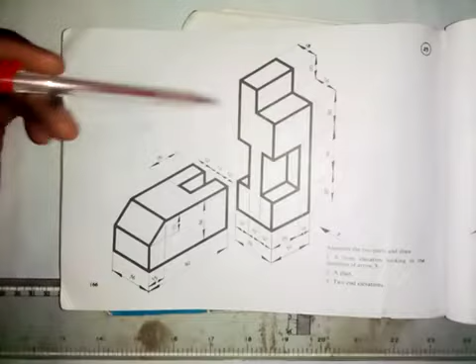Welcome to my channel, and here I'll be showing you how you can assemble this part together, as we are told here that we should assemble the two parts. Okay, so what you want to draw is to put this body on this body. So that's what you want to do. So I'm going to show you how you can do that with ease.

As you know, these are two isometric objects, and we have to put them together to form one isometric object.

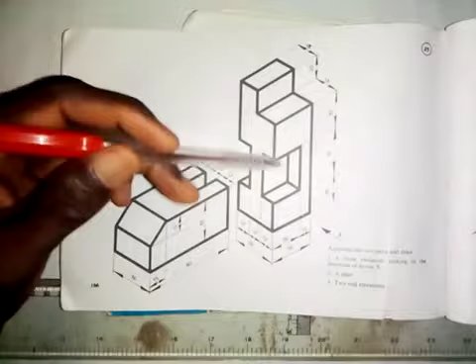And it's very important that you practice this subject. Very important. I'm using JN Green. That is a textbook with the blue cover, and I'm on page 166 of the textbook. So I'm not going to explain dimensions, as I'm showing you how to put the two parts together, how to assemble them. I will also be making mention of dimensions as we have here. So let's start. First of all, we are going to draw this particular body first. So we are drawing this first, then we put this on it.

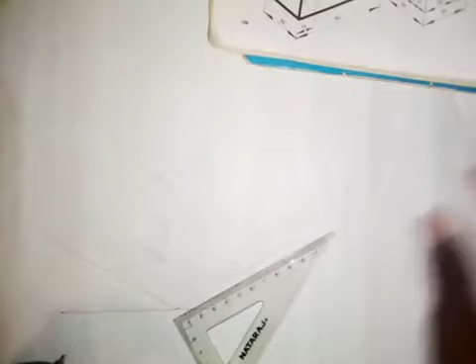So let's start. The first thing we need to do here is to draw a horizontal line. So we draw a horizontal line like this. Okay, so then we take our 30-degree set square. So we draw a line in this direction. Make sure you have enough space on this side, and also we draw a line in this direction with our 30-degree set square. If you have the textbook with you, just open it and follow me as I'm doing it here. So we have distance from here to here to be 30 millimeters.

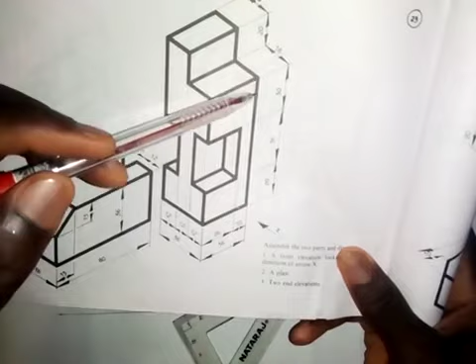Distance from here to here is 24 millimeters. This is 12. So that's 24. Sorry, that's 36 millimeters. It's 36, not 24. This is also 36. And then we have distance from here to here. So this is 20, this is 36, that's 56, plus 30 again, that's 86. And then we have 20 from here to here. So that will give us 106.

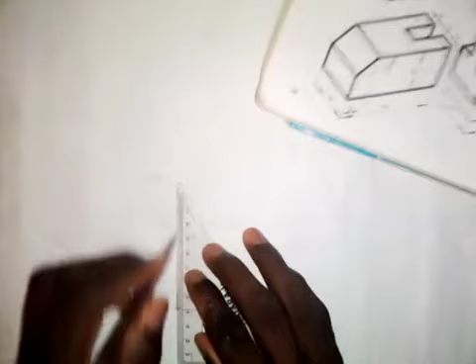Okay, so what I'm going to do first is to draw a vertical line here. So here I'll be drawing a vertical line up like this. Then I'm going to take a measurement of 36 millimeters. So this is 36 millimeters. So I'm going to draw a vertical line at this point like this. Okay, so I believe you can see the line.

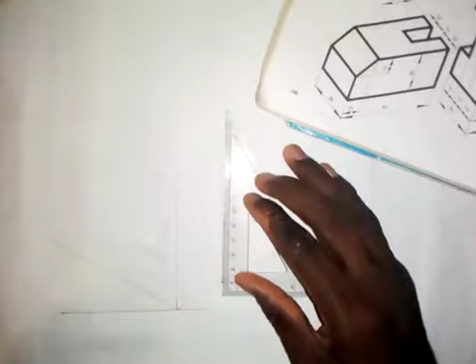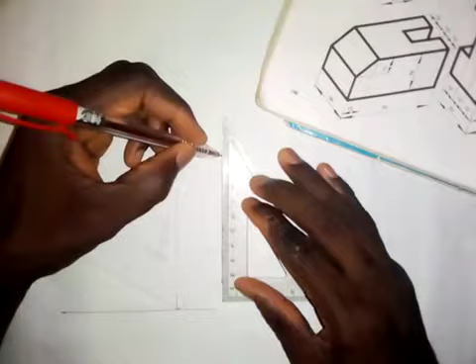So the next thing that I'm going to do is to take a measurement of 20. So I'm taking 20 here first. Then I will take 36 millimeters. So this is 36 millimeters here. Then I'm going to take 30 millimeters after this. This is 30 millimeters. And then I will need to extend this line. I'll take this line up a little bit like this.

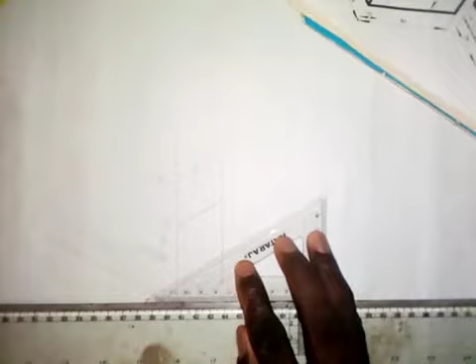So here I'm going to draw this line. For this point, I will draw this line in this direction. Also, I will come to this point and draw this line in this direction. Also, I will come down here and draw this line in this direction. So first of all, I want to work on this part first. So that's what I'm trying to do. So we'll draw this line in this direction. So we have that.

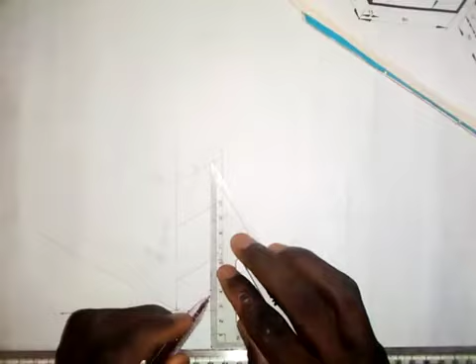So I will also come down here and take 10 millimeters from here to here. If you are looking at the drawing in the textbook, you know what I'm doing here. So here I will draw a vertical line from here to here. Okay, so the next thing that I'm going to do is, I'll come to this point here.

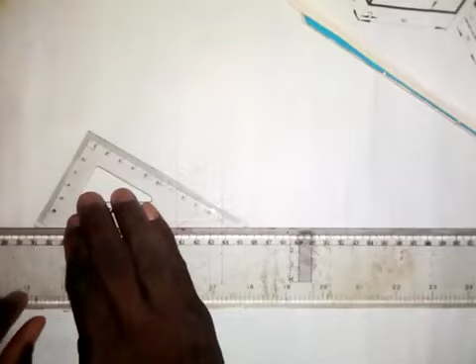I will draw a line in this direction, and I will also come to this point here. I will draw a line in this direction like this. So let me show you the line that I drew there. So this line and this line, that is what I did here. So the line that I drew here is this line that we have here.

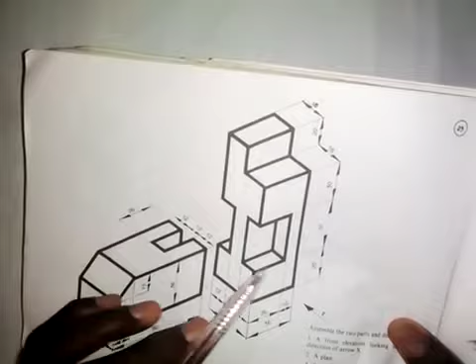Okay, so I want to form this part. Let me come down and form this part that we have here. But before that, I need to work on this part. Let me work on this part so that we can see what we have. We can bring out this shape here. So that's what I want to do.

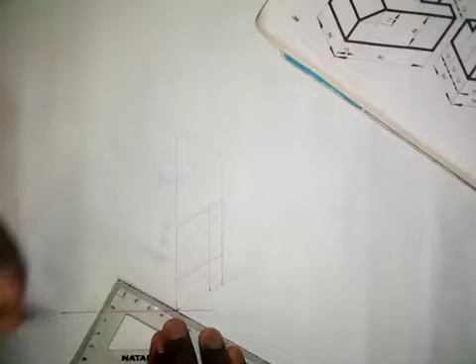So you first of all take a measurement of 36 millimeters. So this is 36 millimeters, and I'm going to divide this. That is 12 as we have in the textbook. So this is 12 millimeters. So next, we take another 12 millimeters. So this is another 12 millimeters here.

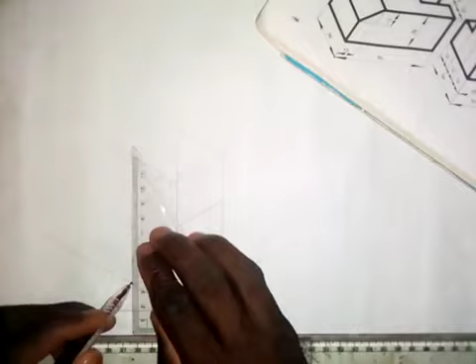Okay, so here I'm going to draw a vertical line. So here I will draw a vertical line. Here also I will draw a vertical line, and here also I will draw a vertical line. Okay, so looking at what we have here, at this point I'm going to draw this line. So draw a line from this point in this direction. I will come to this point also, I will draw a line in this direction.

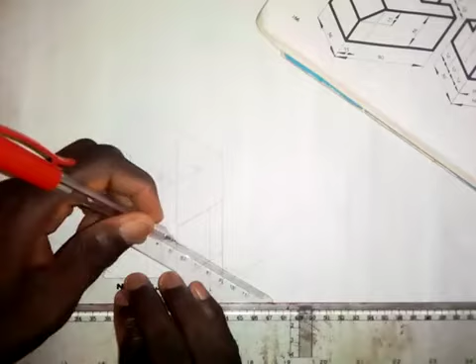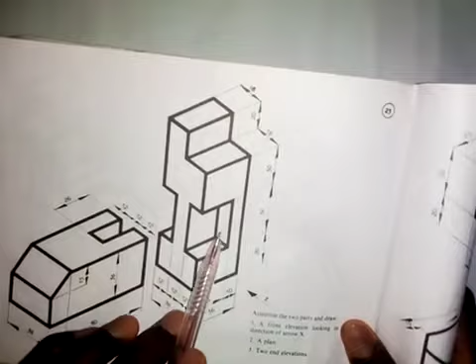And then coming down here, from this point I'm going to draw a line in this direction to meet this line. So wherever this line meets the line that we have here, I will draw a vertical line up, which I believe you can see now. So what I've done here now is that I brought out this shape here. So I brought out this shape that we have here.

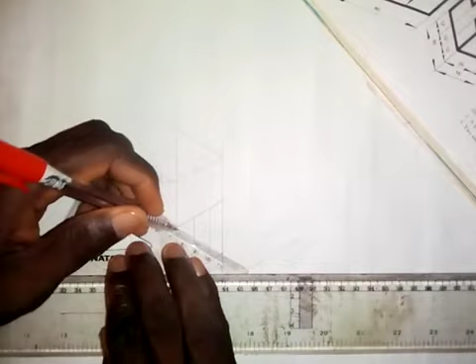So also from this point that we have here, I'm going to draw a line in this direction like this to meet this line. Okay, and then I will come up here. So coming up here at this point, I will also draw a line. So draw a line from this point in this direction. Okay, so looking at what we have here, let me bring out the shape that we have produced here on this part. Let me bring it out.

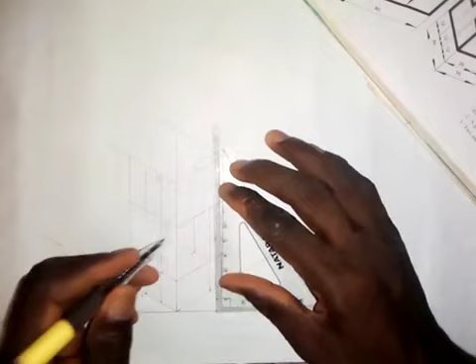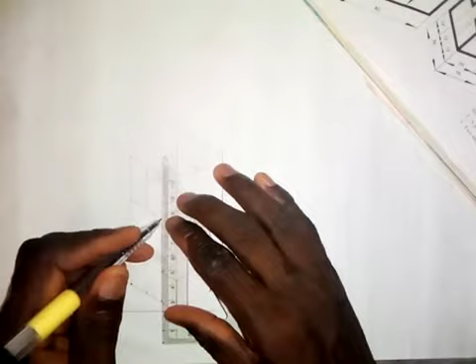So I'll make this line a thick line. So make this line a thick line like this. Okay, so this line also is a thick line. This line is a thick line. This line here is a thick line. Then this line also is a thick line. So this line is also a thick line. Okay, so this line will be made a thick line from here to here.

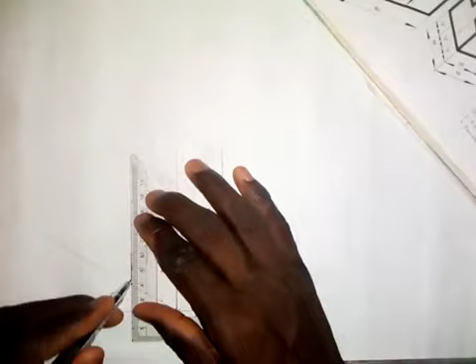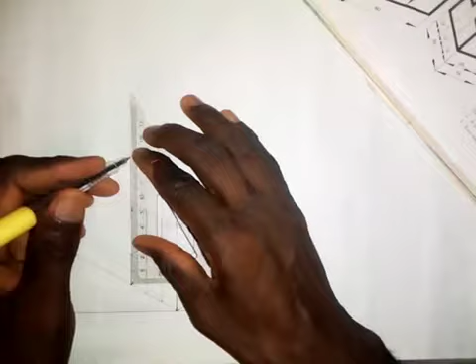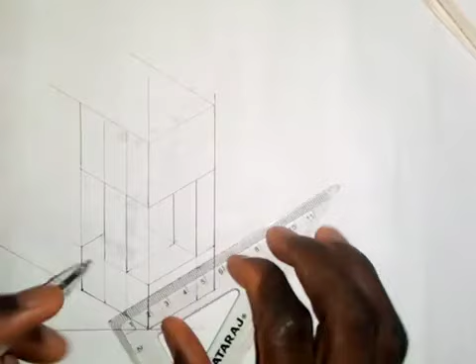And also I need to make this line a thick line. So this line also is a thick line from here to here. Okay, so then we need to make this line a thick line from here to here. So we also make this a thick line, and this line also will be a thick line from here to here. Okay, so this line we made a thick line from here to here. So also this line, make a thick line from here to here.

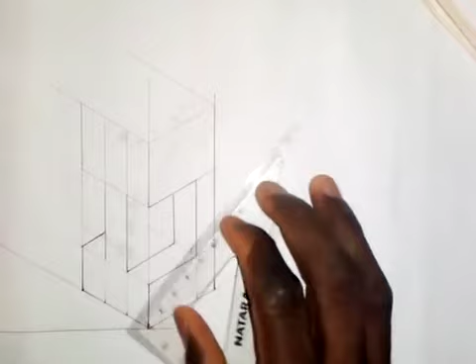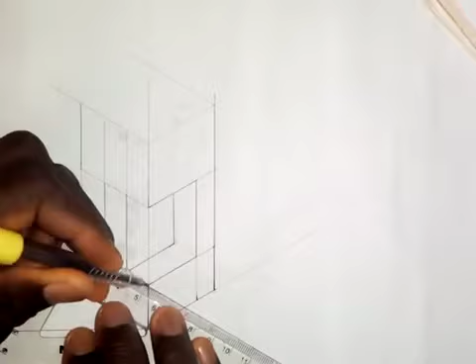Okay, so we are bringing it out little by little. So I need to come here. So I make this line a thick line from here to here. Also from here to here, this line will be a thick line. Okay, so I will also make this line a thick line from here to here. Alright, so then coming up here, I need to make this a thick line from here to here. So also from here to here, make this a thick line. Okay, so the work is coming out little by little.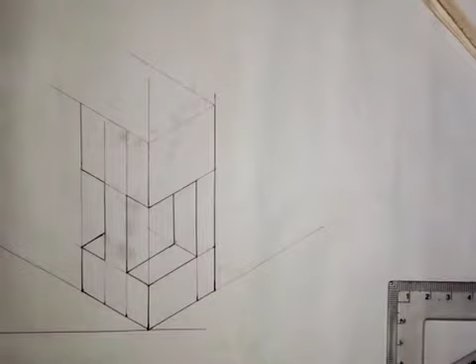So let's go and work up here. So we want to work up here now. Let's bring out this shape as we have here. So we have that distance from here to here is 18 millimeters.

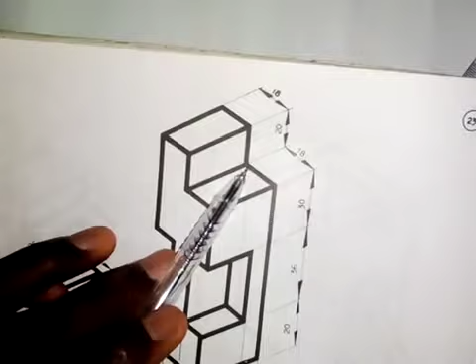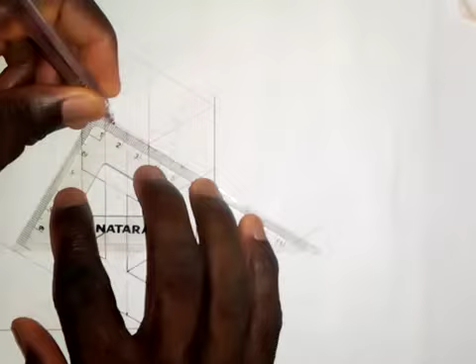From here to here is also 18 millimeters. So what we need to do now is to take a measurement of 18 from this point. So we take 18 millimeters from here. So this is 18 millimeters here. So here I will draw a line. I will draw a line from this point, transfer it to the other side like this.

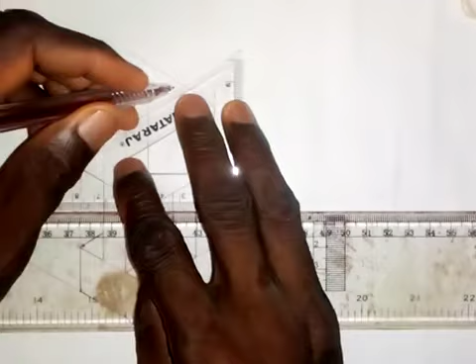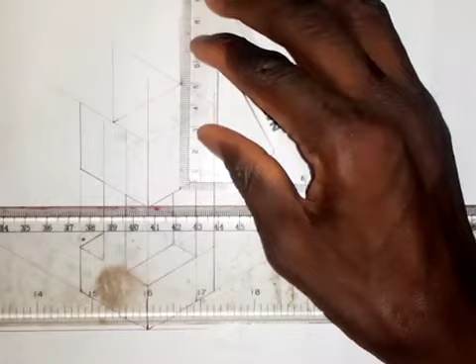So then I'm going to erect a vertical line at this point. Also here I will erect a vertical line at this point. Okay, so the height from here to here is 20 millimeters. So I will take 20 millimeters here. So from here up I will take 20 millimeters. This is 20 millimeters. So I will transfer this 20.

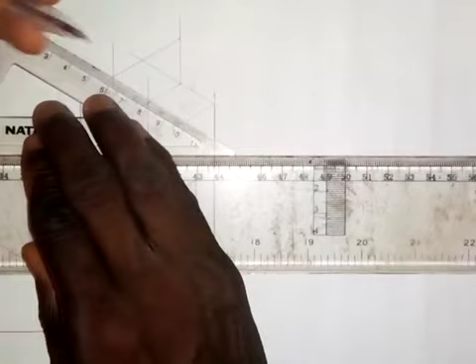So I will take it, bring it to the front side, and I will take it to this side. From this point I will take it, so take it to this side, and I will come here also. So come in here, so I take it to this side. Then I'm going to draw a vertical line here. And then here also I will draw a line. So I will transfer this point to the other side like this.

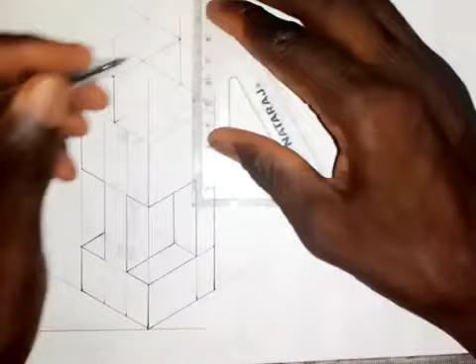Okay, so I believe you can see what I've done so far. So all I need to do is to make this a thick line. So I make this a complete thick line, and this line also is a thick line like this. So here I will make this line a thick line. So this line also is a thick line.

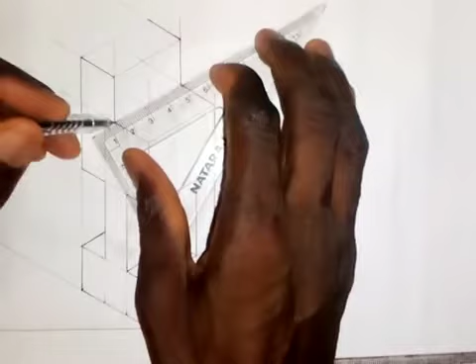Okay, so then this line will be made a thick line. So this line also made a thick line. Also this line is a thick line. So this line here also is a thick line. Alright, so you can see that we are done with this part. Looking at what we have here, we have completed this part.

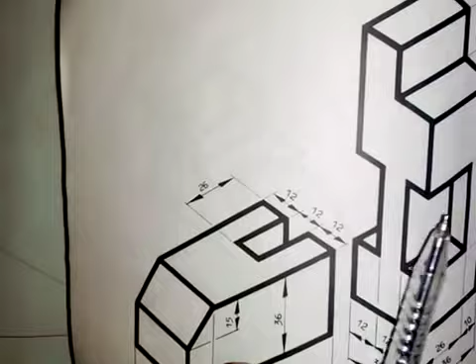So we need to put this one here now. That's what I want to do now. So let's see how that will be done. If you look at the distance from here to here, which is 36, it's also the same as what we have here, 36. It is written here, 36. And from here to here, this is also 36, this is also 36.

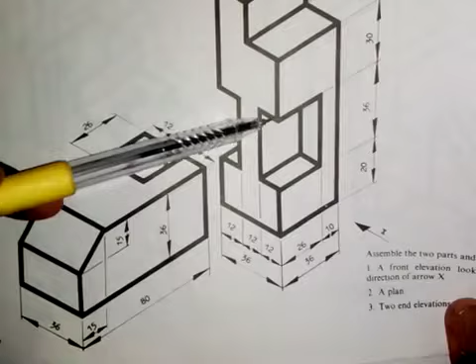So distance from here to here is 12, this is 12, and distance from here to here is 12, this is 12. This part here is entering into this, so the groove that we have here, or the hole that we have here, is entering into this. So that's how we are going to do it.

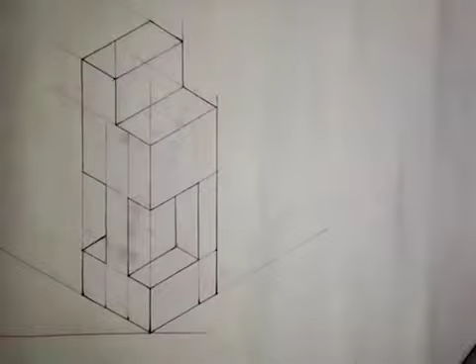So what we need to do now to fix this on this is that from this point here, we extend, we draw a line. So we are going to draw a line from here. From this point, just take it forward like this, and you come up here also. So you take this line forward like this, and you come here also. Okay, that's what we need to do.

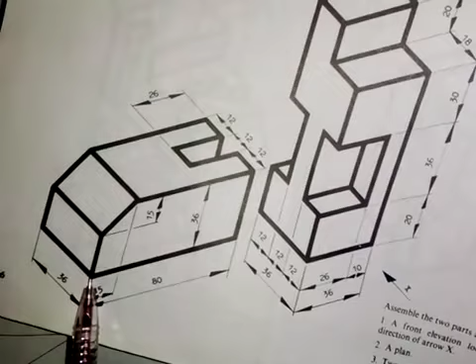So the next thing that we are going to do is, as we have the distance from here to here to be 26, we are going to take a measure. The total length from here to here is 80. So we are going to subtract 26 from 80. So whatever we get is what we are going to take as its distance from here forward. Okay.

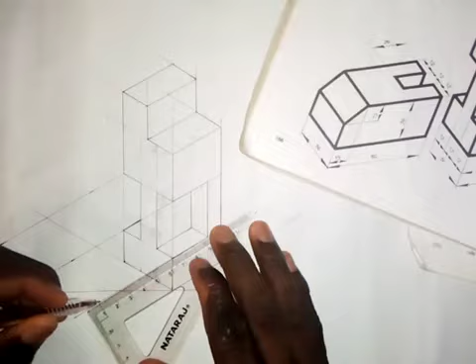All right. I've subtracted 26 from 80, and that gives us 54. So what we are going to do now is to take a measurement of 54 millimeters from here. So from here to here we take 54. So this is 54 millimeters. So here I'm going to draw a vertical line like this.

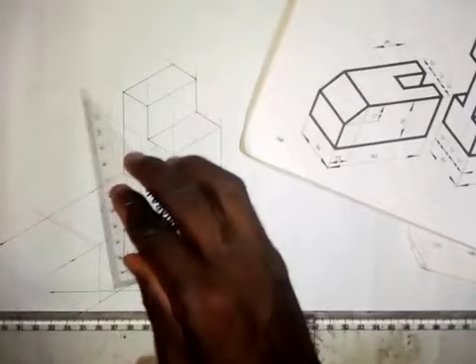And I'm going to transfer this point here to the other side. Okay, so I transfer this point to the other side, and here also I'll take this point to this side, and this point here I will bring it down here. All right, you don't have to worry, bring out the shape.

Now if we are putting this shape on this one here, there is a part we are not going to see. We're not going to see this line, we'll not see this line. So I'm going to remove those lines since we are putting the other one on it. So I will remove this line like this.

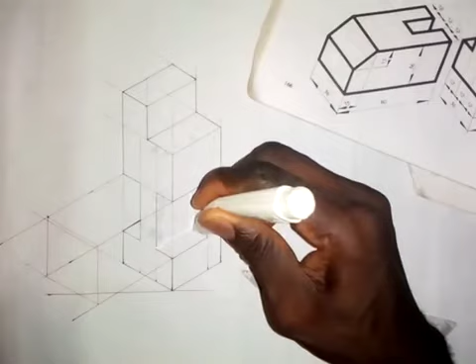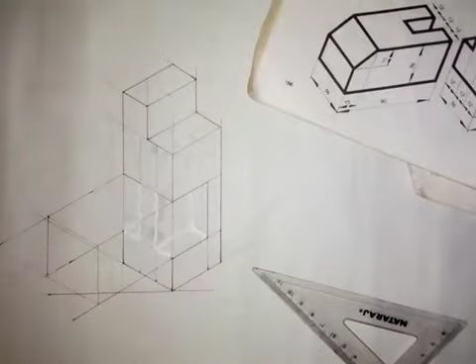Okay. So we'll not see this line too. This line also we will not see. We'll not see this line here. So I need to remove this, so you will not see those lines. So I've removed them. So the next thing that we are going to do now is to bring out this shape as we have here.

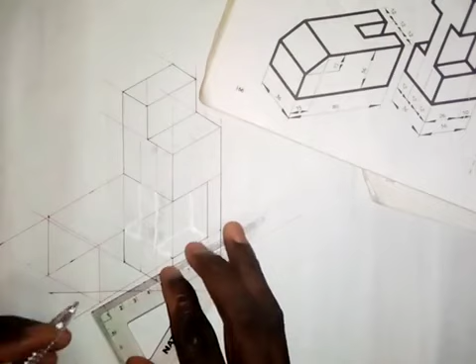So the distance from here to this point is 15 millimeters. So coming down here at this point, I'll take a measurement of 15 millimeters. So I will draw a vertical line here. I will still need to remove something, but I'll come back to that later. So I will draw a vertical line here like this.

Okay, so the distance from here to this point is also 15. So I will come on this line here and take 15 millimeters down. So now I can join these 2 points together like this. The next thing I'm going to do is to transfer this point to the other side, and also this point here I will transfer to the other side like this.

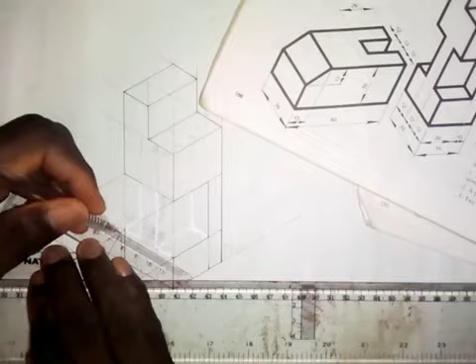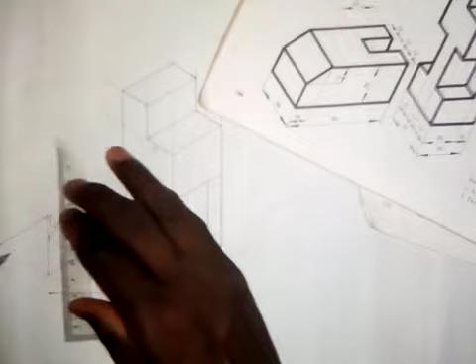Then the next thing to do, let me make this a thick line at once, is to join this together like this. If you are using your pencil to draw this, it is easy for you to use your eraser to remove the unwanted lines. So you don't have to worry if you make it a complete isometric object first, you can easily erase it. So it's very, very simple.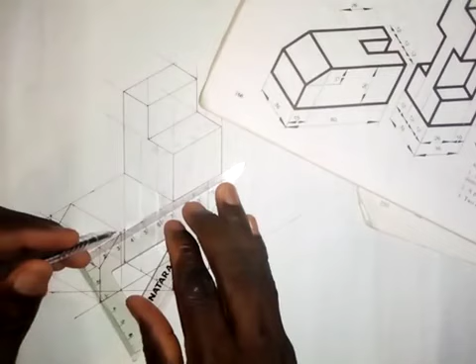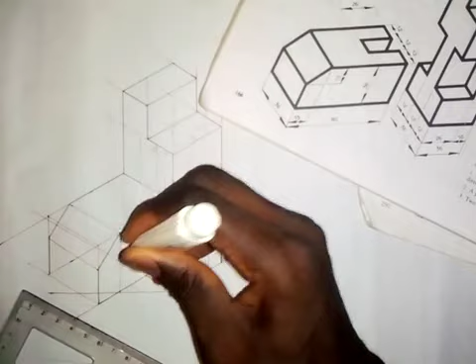For me, I'm using a pen so that we can see the work. So we make this line a thick line from here to here, and this line also is a thick line from here to here. Then this part we are not going to see, so I'm going to remove this line, and I'll remove this line too. All right, those are the lines that we need to remove.

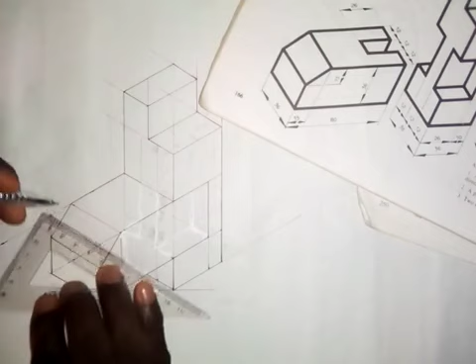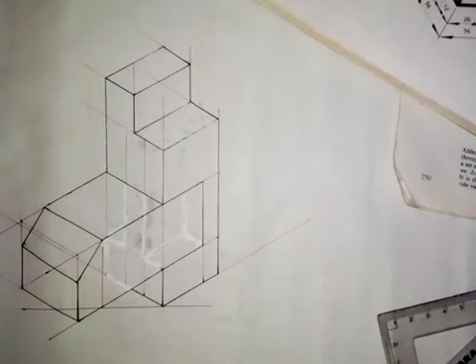So I also make this line a thick line from here to here. I will also make this line a thick line from here to here. And this line also, you make it a thick line from here to here. So this is how the assembly will look. As simple as I've shown it here. All you need to do is to practice.